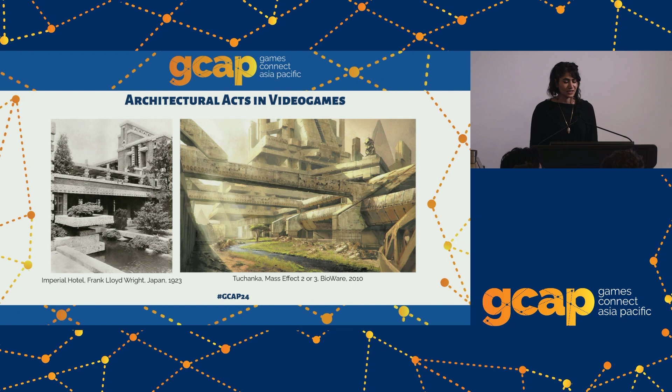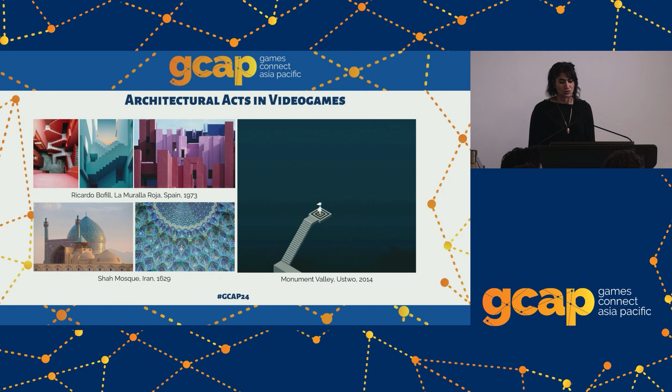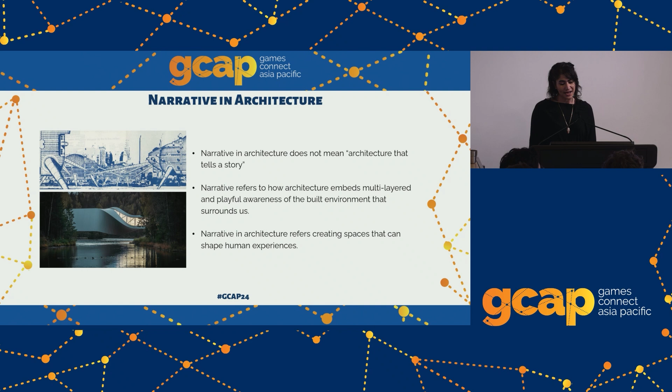Narrative in architecture, rather than being storytelling in its traditional sense, does not mean buildings telling stories, but it refers to how architecture as the built environment in general provides experience, how it makes you feel, how architecture conveys an understanding of the space you're in or surrounded by at that moment. Putting it plainly, narrative in architecture is how the built environment can shape human experiences.

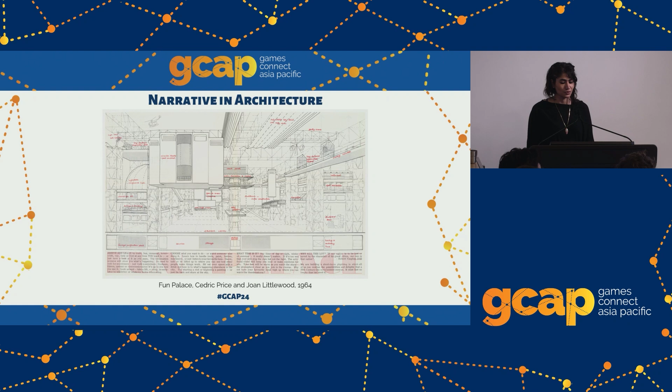And I will go through this topic by introducing some examples. My aim is to show how architects and urban designers think and design spaces that shape our real-world experiences. And the examples try to work as sources of inspiration for you to help you tell your own interactive stories in creating experiential spaces.

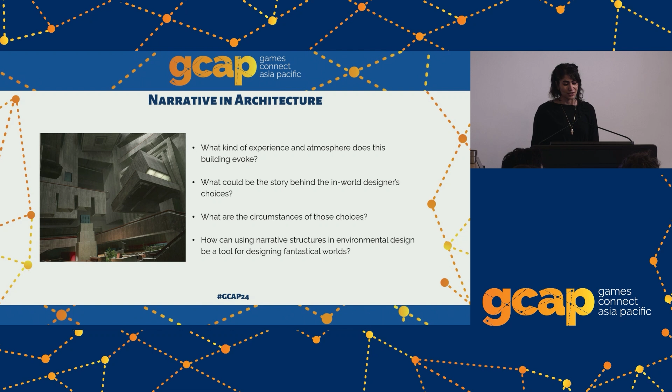Some aspects that you can think about when encountering these examples or after this session about architecture are: what kind of experience and atmosphere does this building evoke? What is the story behind the designer's choices? What are the circumstances of those choices? Is it referring to a function? Is it holding anything? How can using narrative structures in environmental design be a tool for designing fantastical worlds that do not yet exist?

I'm going to touch on the topic by providing examples in 3 scales: city scale, individual buildings, and then architectural elements. So I start with the first one.

At the scale of the city, urban designers emphasize how much the city is legible and readable for their inhabitants and visitors. For sure, when you go to a city, there are some parts that you like, some parts you hate, and some parts that are memorable for you. You make distinct memories of different cities that you go to, of the personality of the city, and you make an image of that city in your mind.

So in the first book, The Image of the City, Kevin Lynch, the writer and an urbanist, did interviews with people living in particular cities and found out that there are some urban elements that help people to describe their surroundings, how they understand a city, or what is known as making a memory trace or cognitive image of a city. What enables them to better navigate the urban areas and not to be lost.

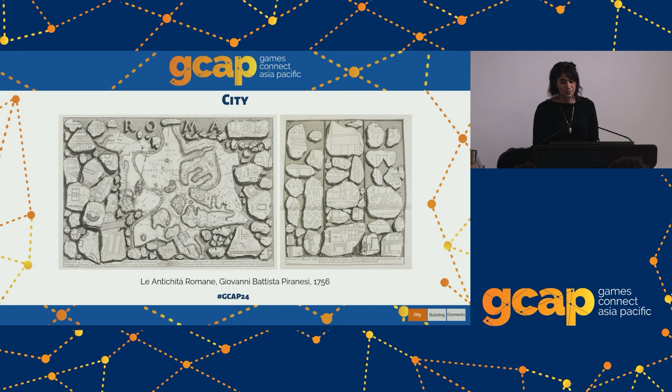This approach of reimagining cities can be seen in historical artistic mappings too. This is a map of Rome by Giovanni Piranesi. It shows Rome, but with one main difference, that is, it consists of landmarks, of memorable bits of Rome that we see. When you see it, you will be like, yes, it is Rome. So it recreated the city by its points of interest and landmarks.

And we see that Los Santos is much smaller than Los Angeles, because to experience a city, you do not need to make everything. You can create points of interest and some routes that connect them together. So the player is experiencing the city according to points of interest, how they are connected, vistas, and how the sequences of spaces are designed. And the same thing happens in Assassin's Creed to introduce real-world cities in the game.

And now we get to the second section of these categories, to talk about design at the scale of individual buildings: how to make one building memorable, how buildings can stand in contrast to their surroundings and speak their character in different ways. In this section, I try to give examples of architectural buildings that are not just offering a background for activities, but also become an object to be seen. So talking about how architecture can show itself and speak out its characteristics.

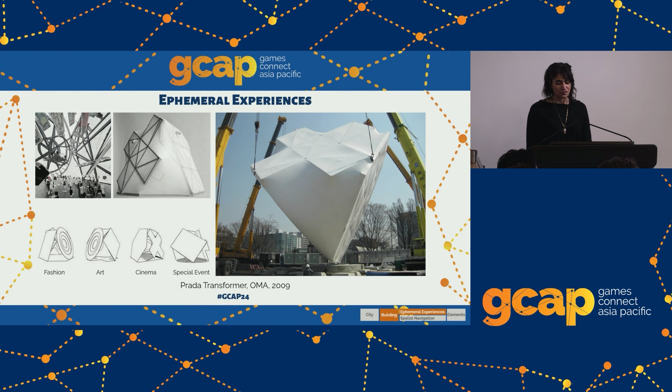The basic geometrical shape on each side, which are a circle, a rectangle, a cross, and a hexagon, are designed to fit the function at best to work for the plan. And after each event, they use cranes to rotate it. The architect described the design as walls becoming floors and floors becoming walls through this rotation and flip to accommodate different events.

The location of this structure was next to a 16th century palace in the center of Seoul, and the structure stands with stark contrast to it, very ancient and very modern, Western and Asian. The contrast between the structure and its surrounding is also clear through the use of material, a white translucent membrane that wraps the structure and links different shapes of the structure together.

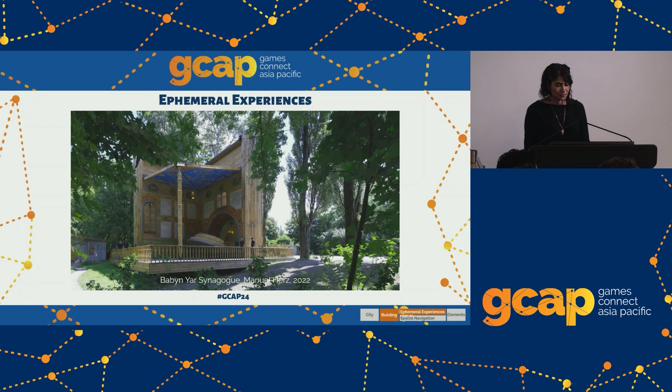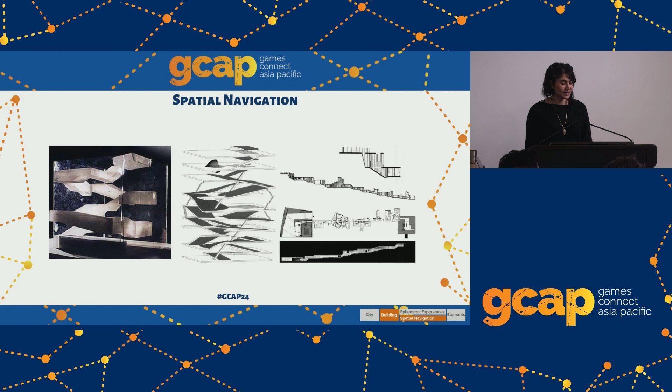The second way that I want to talk about as a way to enhance the architectural experience is very similar to what I mentioned in the part talking about cities. While people are moving, through this movement you realize the change of space, again like a storyboard, but in buildings and their associated characteristics, forms, dimensions, proportions, materials. Here, how to flow the movement in a space becomes a part of the design, allowing architecture to tell a story through the journey it creates. And this is a very common way of storytelling in games, how to design the movement and sequences on the way.

The Jewish Museum in Berlin is a powerful example of how architecture can narrate a dramatic history in this way. The building tells the story of the Jewish people's history using form, scale, lighting, and materials to evoke emotional responses. It takes people through long and broken paths, which emphasize the idea of the historical journey of the Jewish people, displacement, persecution. The zigzag paths symbolize the fragmentary, and the broken lines repeat on the facade of the building. Inside of the building, along the way, the scale of corridors changes and gets wider or narrower to convey a sense of claustrophobia and discomfort or hardship.

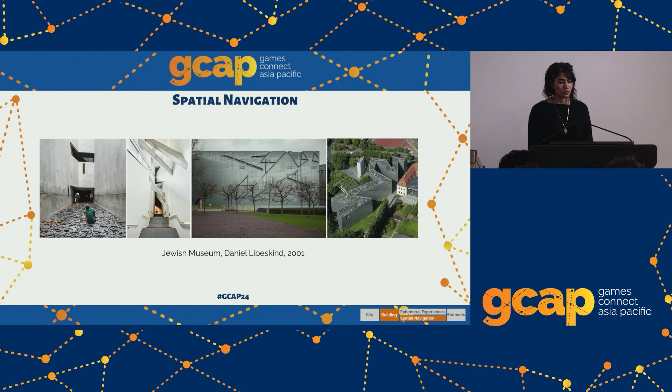In one part of the museum, you are not walking on a nice smooth surface. You actually have to walk on creepy, big, heavy metal faces that will make disturbing sounds that echo in this confined space with a very high ceiling.

Referring to the Jewish history, they are using environmental storytelling in architectural terms here. Each architectural element plays a role in telling the story, creating a visceral connection between the space and the history it represents through playing with forms and the scale of spaces. One of my friends also let me know that the sound is somehow industrial on this loose sculpture and refers to the industrial way of massacre.

Water Temple creates this sequence of spatial experiences with a downward movement to the temple beneath a lotus pond. The architecture tries to make a profound connection to nature and guide the movement of visitors around the building, blocks their view to the pond with an unadorned concrete wall, and then down to the hall, which is dark, and you have to move towards the light. So through form, he's making a spiritual journey.

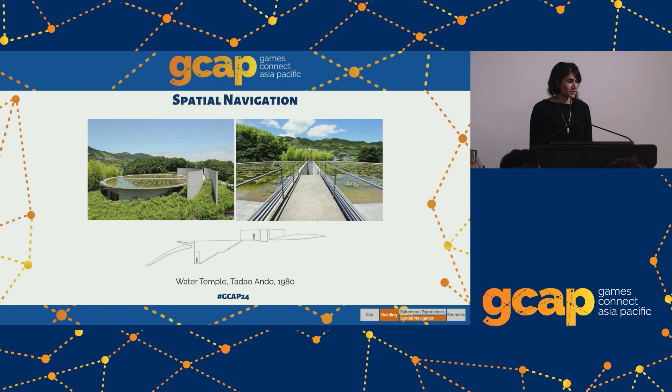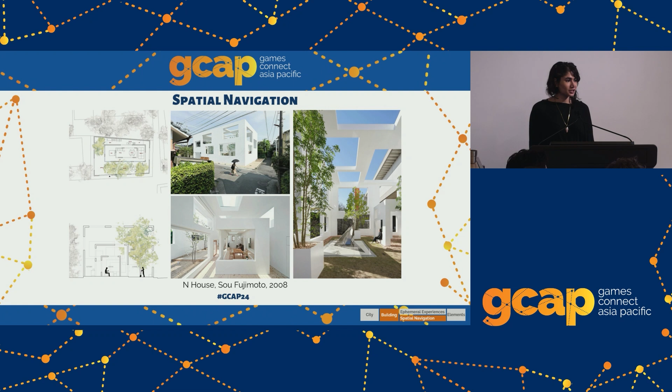Spaces in this house are also designed by considering how to change spaces while you're moving from a public outdoor space to inside. It introduces three kinds of spaces: open, semi-open, and closed along the way. The open public space transforms to closed private spaces inside while you move inward, and vice versa when you move outward. For this, the scale and the height change, and this idea of seeing spaces as volumes can be interesting for games.

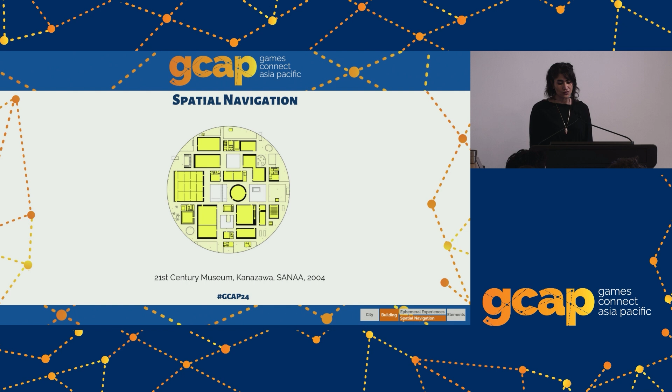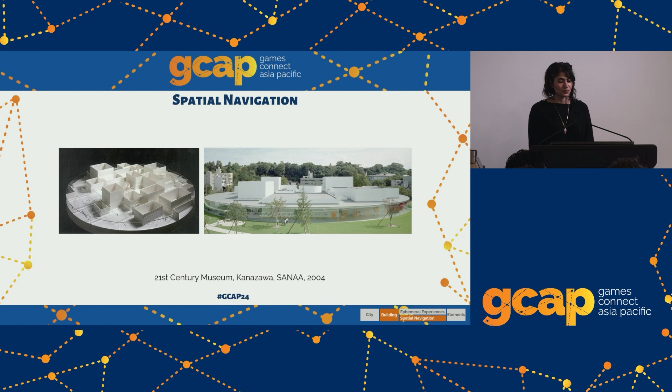So what I mean by that, to consider spaces as volumes, is that if this would be the plan, a map design for a game, it gives a feeling like you have the spaces and functions and programs arranged under one roof. And then these spaces just need to be extruded to accommodate the function. But we can play with volumes to make interesting spaces, both inside and outside, how to change proportions and dimensions in them. Also here, changing the topography of the plan, going up and down, introduces new places of events and also helps to create different lines of sight.

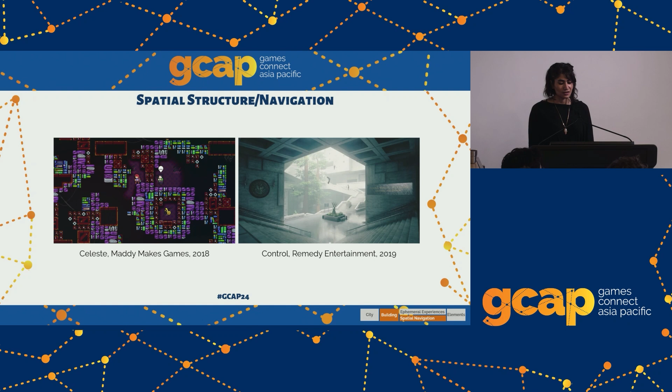The consideration of actions and according to that designing of spaces can be compared to Metroidvania games in 2D spaces, where the level design is specifically designed for the actions, and later when you find more abilities in the game, spaces change to respond to other added abilities. Control does the same in 3D space, where architecture can play a main role to provide this dramatic experience through organizing spaces. So the atrium in Control performs as an elevator, as a circulatory connection, redefining its meaning in games.

This building also thinks of spaces as volumetric, that can vary. It is designed more inherently with the idea of three-dimensionality of spaces. This is a residential place, which is changing the definition of plan to not situate everything on one level and creating discrete platforms. It arranges rooms as chunks of spaces next to each other and connects them using stairs from different directions. That will create a specific way of navigation and creates different lines of sight to each chunk of space.

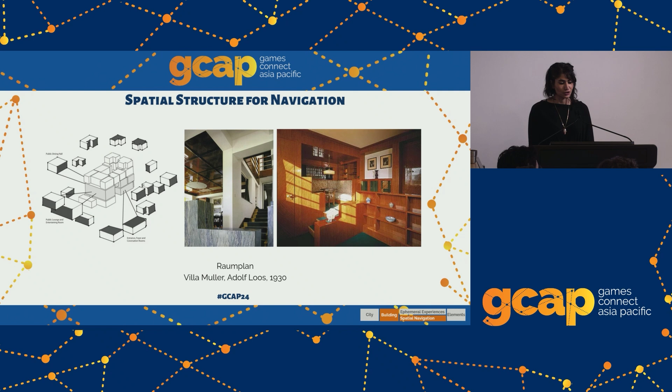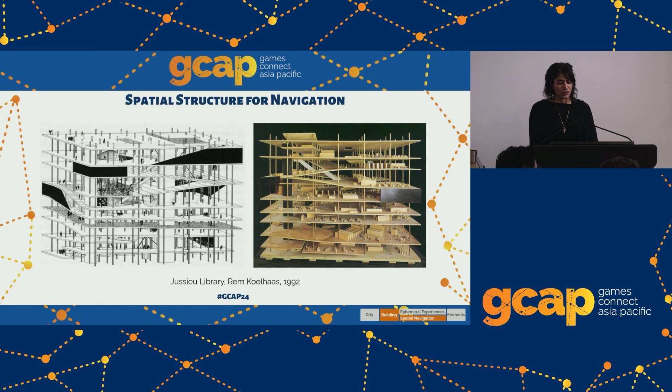Rem Koolhaas in this project tries to really take this idea of continuity and movement and emphasize it even more. Koolhaas is using ramps, which are smoother modes of navigation to move people from one floor to the other, to connect spaces, which is a lot more continuous. This one has more flow as opposed to the previous example, which was more distinct.

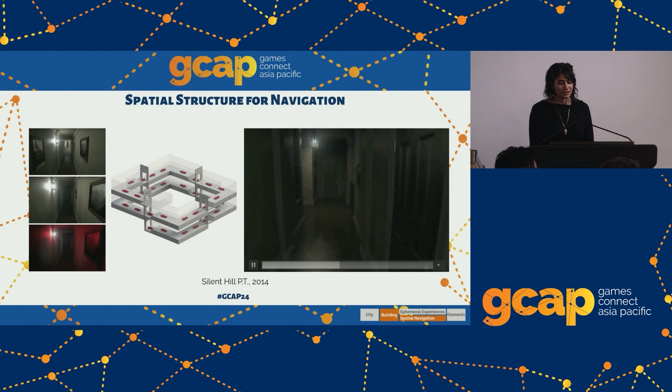It is used to exceptionally good effect in Silent Hill P.T. It is an infinitely repeating corridor that you continuously pass through. With each cycle, the corridor changes, becoming noticeably unsettling and more evil, with subtleties like a monstrous entity spying on you through a cracked door and bleeding walls. In the design of the corridor, what is happening is using the idea of continuity, as you can see in the diagram.

So this is the last part I want to talk about, which is about elements and details. In visualization, it is important to reach a coherent aesthetic. To achieve this, designers should pay attention to both the overall design and also the world-building elements, such as what assets and materials to use, and details to make sure of the authenticity of the world building. So rather than using free assets, try to design them for that environment to form a unified visual language.

On this matter, there is a lot to learn and be inspired by from real-world designs, like the transition between different materials, how different forms work together, how lighting design works. In architecture, elements can be seen in two ways. One is separate small-scale components like doors, corridors, and hallways that are spaces by themselves and make the whole building, or details like light, materials, structures that are tectonic aspects of architecture that can add atmospheric details to a space to make a different sensation in it. And I'm going to talk briefly about these two categories and how they can contribute to storytelling in video games.